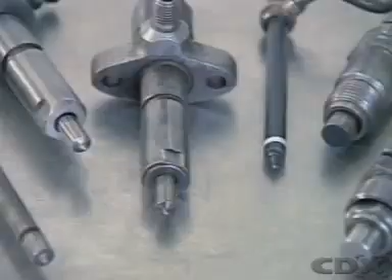Most diesel fuel injectors use the same basic design, made from heat-treated alloy steel. The actual shape will vary according to the application.

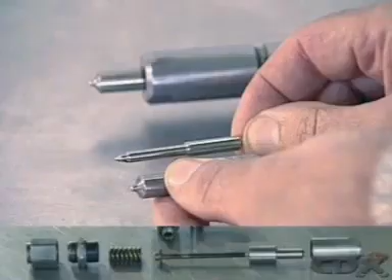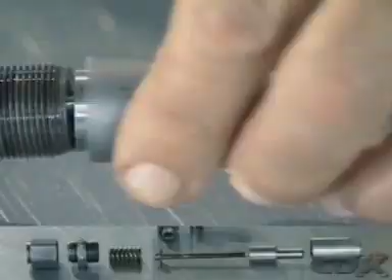The injector assembly has several main parts. The nozzle assembly is made up of a needle and body. A pressure spring and spindle hold the needle on the seat in the nozzle body. A nozzle holder, sometimes called the injector body, may allow for mounting the injector on the engine and some method of adjusting the spring force applied to the needle valve.

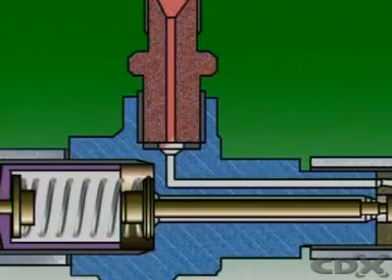A cover keeps out dirt and water. The injection pump delivers fuel to the injector. The fuel passes through a drilling in the nozzle body to a chamber above where the needle valve seats in the nozzle assembly.

As fuel pressure in the injector gallery rises, it acts on the tapered shoulder of the needle valve, increasing the pressure until it overcomes the force from the spring and lifts the needle valve from its seat. The highly pressurized fuel enters the engine at a high velocity in an atomized spray.

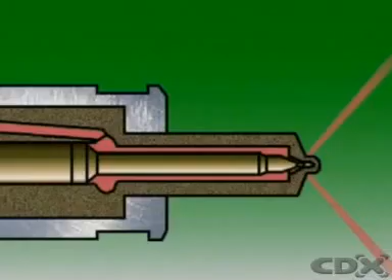As soon as delivery from the pump stops, pressure under the needle tapered shoulder drops, and the spring force pushes the needle down on the seat, cutting off the fuel supply to the engine.

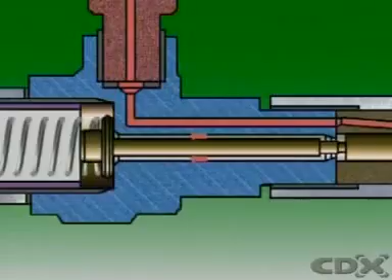Some of the fuel is allowed to leak between the nozzle needle and the body to cool and lubricate the injector. This fuel is collected by the leak-off line and returned to the fuel tank for later use.

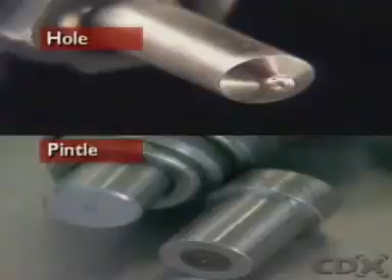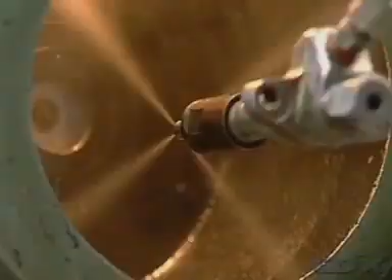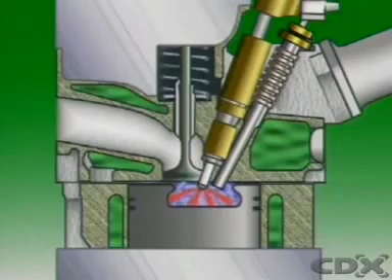There are two main types of injector nozzle, hole and pintle. Hole-type nozzles are commonly used in direct injection engines. They can be single-hole or multi-hole, and they operate at very high pressures, up to 200 atmospheres. They give a hard spray which is necessary to penetrate the highly compressed air. The fuel has a high velocity and good atomization, which is desirable in open combustion chamber engines.

In pintle-type nozzles, a pin, or pintle, protrudes through a spray hole. The shape of the pintle determines the shape of the spray and the atomization of the spray pattern.

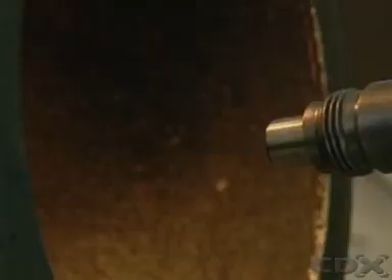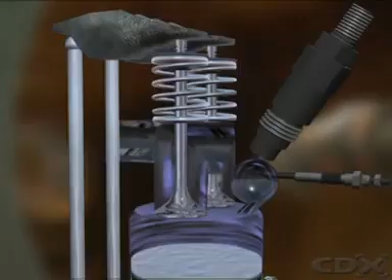Pintle nozzles open at lower pressures than hole-type nozzles. They're used in indirect injection engines, where the fuel has a comparatively short distance to travel and the air is not as compressed as in the main chamber.